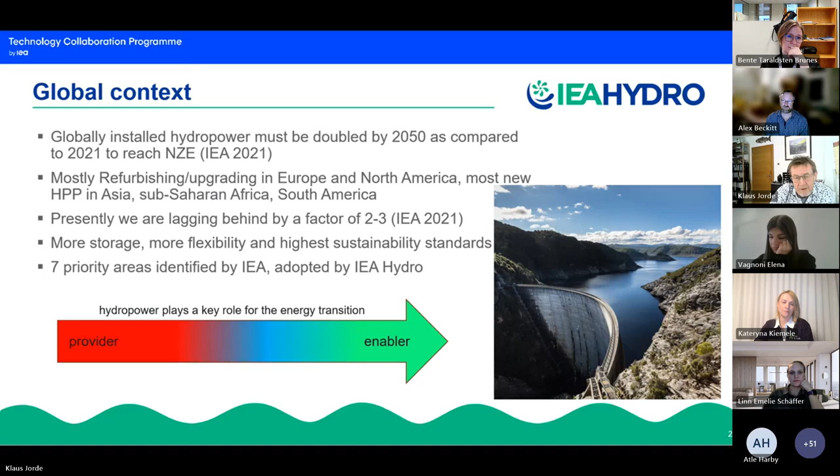Now it's okay. It's a little bit delayed here.

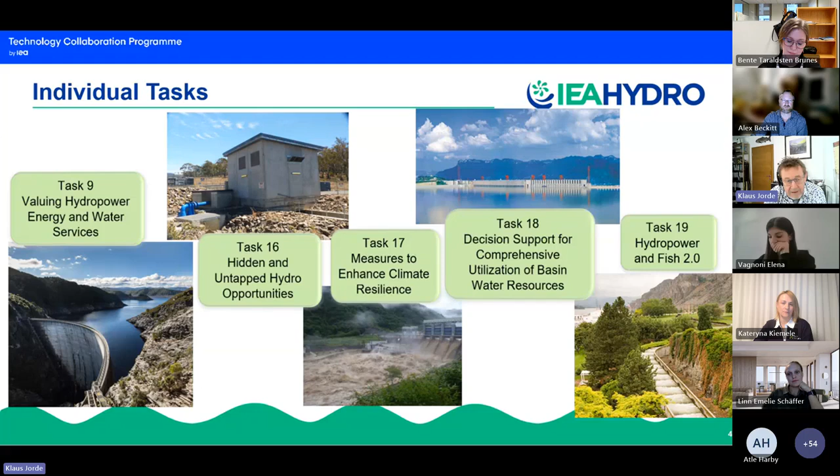Then we have 16 on hidden and untapped hydro opportunities. 17 looks at climate change. 18 is looking at how to make decisions in very large catchments, very large basins with multiple dams and hydropower plants and operators. And task 19 is looking at hydropower and fish issues.

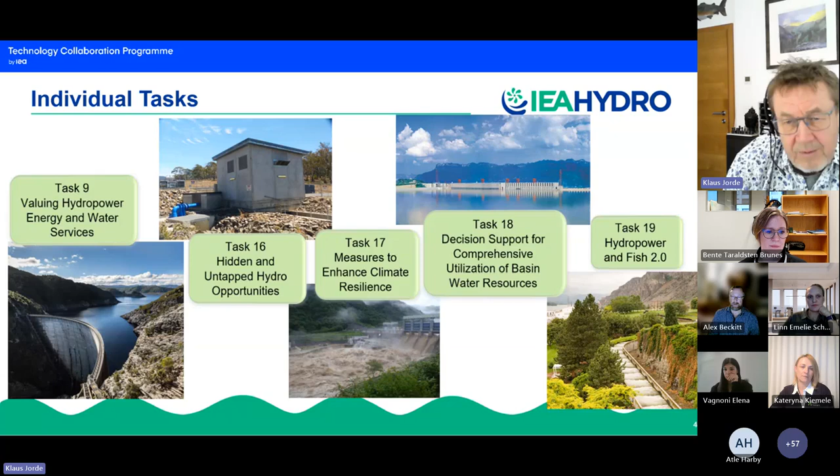It's very weird because it's not moving ahead, and I don't know why it's not changing the slide. Now it does. Okay.

And then we have this topic on hidden hydro, which mostly looks at hydropower at existing infrastructures, but also expanding existing hydropower plants in the way they operate, and they provide storage and flexibility, even if they are not really designed for that. We also added a small pumped storage component to that theme.

And then we have some overarching components like digitization, artificial intelligence, better alignment with the IEA mission, communication, dissemination, increase the visibility, looking for new participants. So that's kind of overarching apart from the technical issues that we are looking at. This is all distributed across the different tasks.

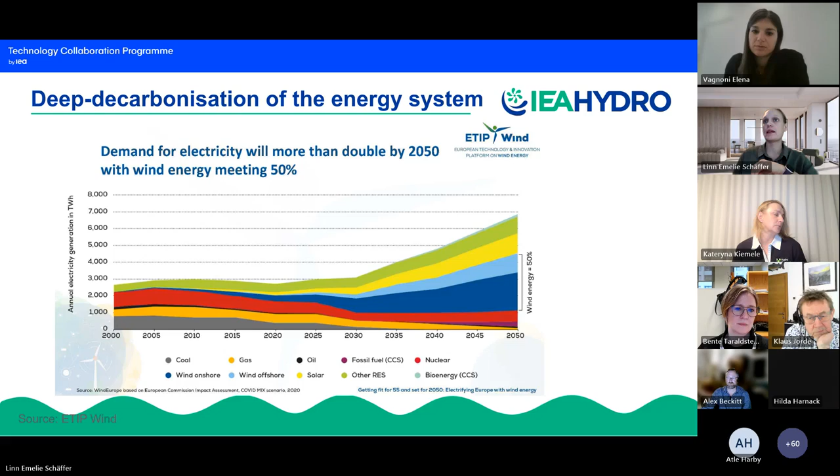Okay, now it's okay. Yeah.

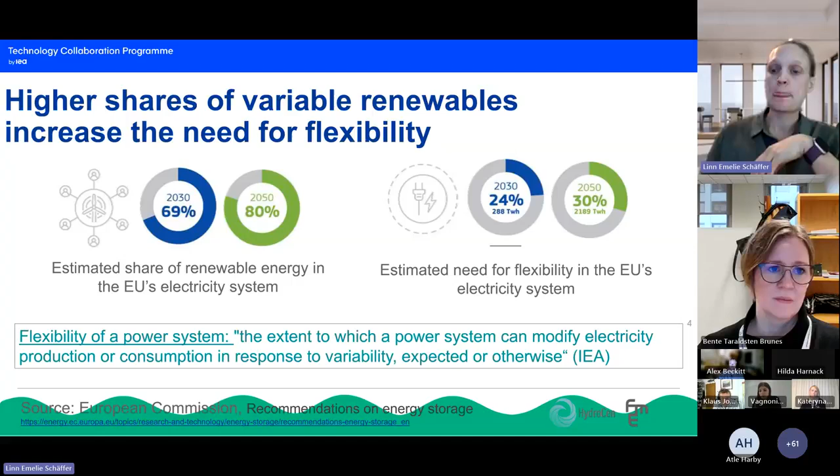So a broad definition of flexibility of a power system can be, for example, this: the extent to which a power system can modify electricity production or consumption in response to variability, expected or otherwise. So this is a definition from IEA, but it's still very broad, and it still holds a lot of different types of challenges to the power system. So in our work in IEA and the workshops and discussions, we have tried to describe this closer and define it into different types of products and challenges.

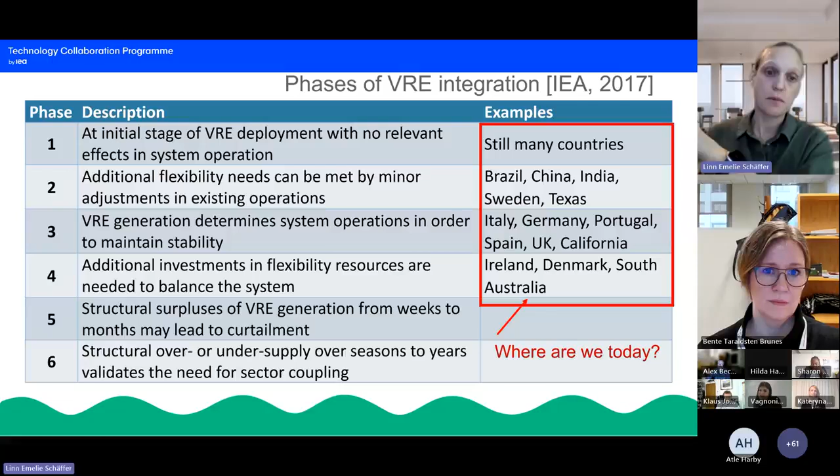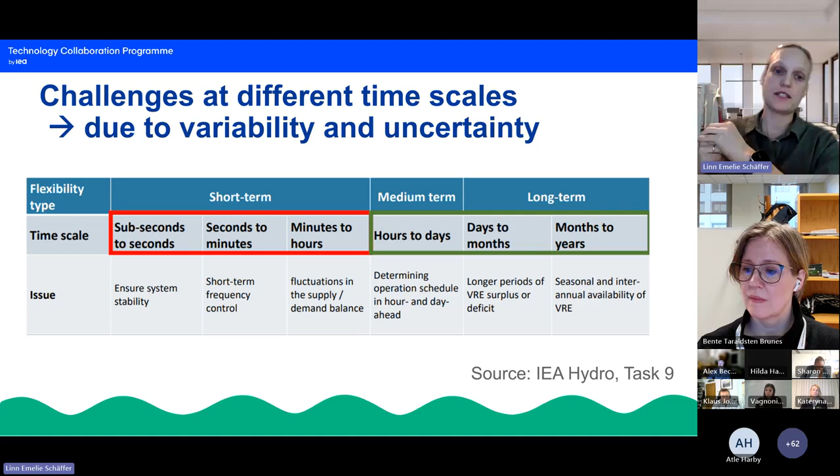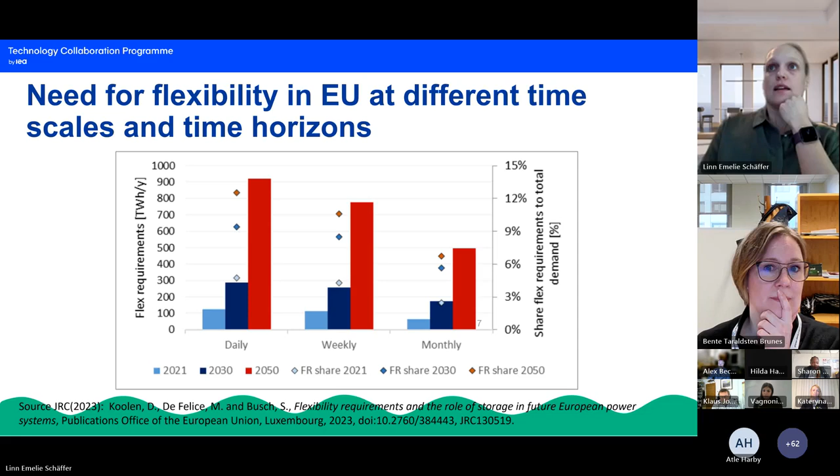I think that we need to progress now, Linnea. Yes, but it is 12 minutes, right? Yes, but please keep that in mind.

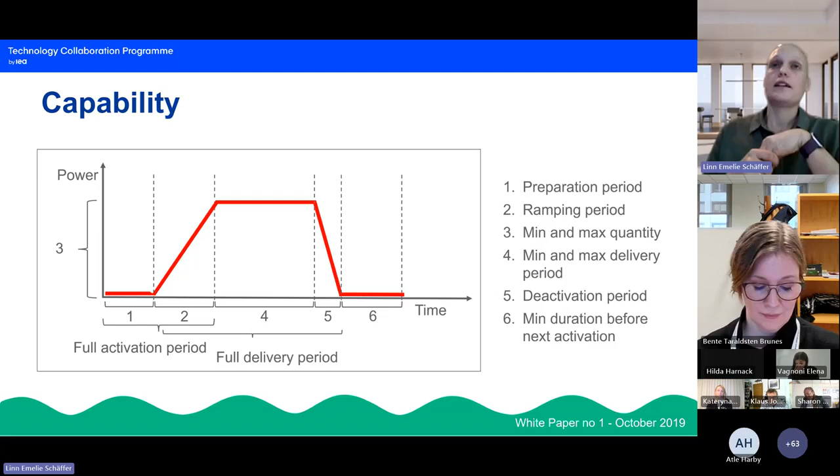Yeah. Okay, and then you can also look at the capability of the flexibility resource. So you have different types of requirements to the services that are delivered. So it can be the preparation period, how quickly you can ramp up or down, the maximum power that is delivered, the total energy that is required to deliver the service over a certain amount of time, and then also the deactivation period and if there is a need for a rest period, or how often or frequently this service can be supplied.

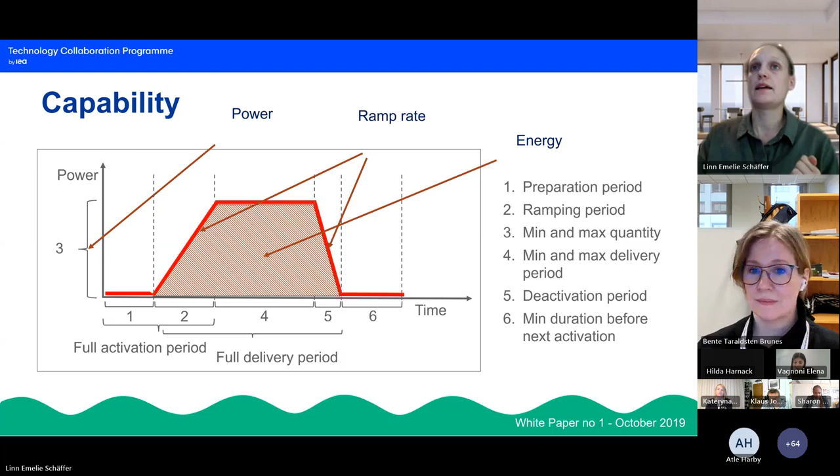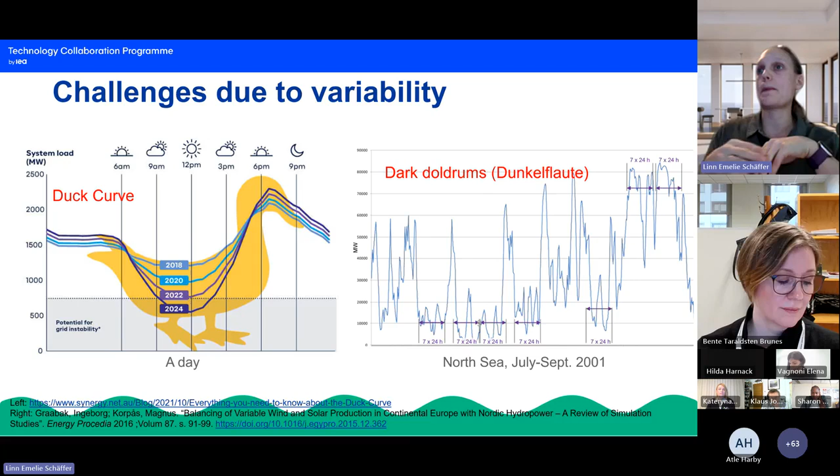And in Task 9, we've looked more into this. So Abhishek Somani has coordinated work on this of resource drought and the need for long duration energy storage. And I think this will be very important now. It's already becoming important, and it will become even more important as we have larger shares of wind power coming into the system combined with solar power.

And the plots here are from this study, and they are for the Californian system. And they have looked at historical data and counted how often these resource droughts were occurring in the historical data. And we can see that there are quite many events ranging from 4 to 16 hours. And there are also a few events lasting longer than 16 hours in this system. And you can also to the right see the total energy deficit.

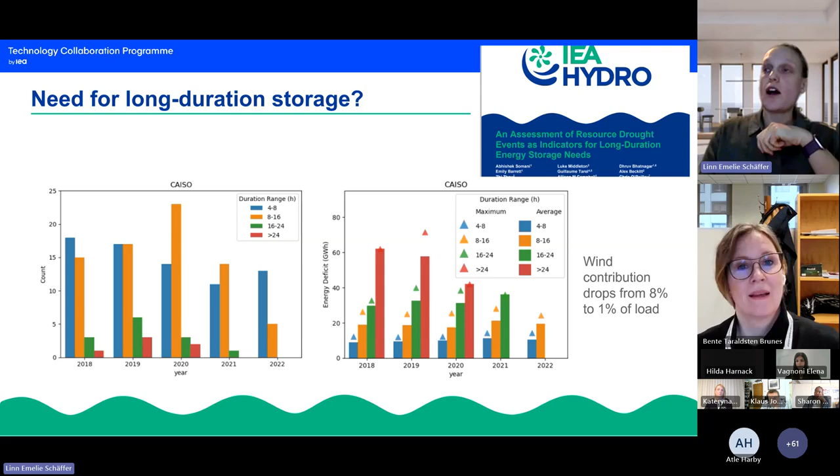And in the current system in California, this contributed to a drop from covering about 8% of load to 1% of load. But you can imagine if wind power is covering a much larger share of the load, it will be very challenging to meet these large amounts of energy over a longer period when you have these drought periods. So this is something we also want to focus more on in IEA Hydro Task 9 moving forward.

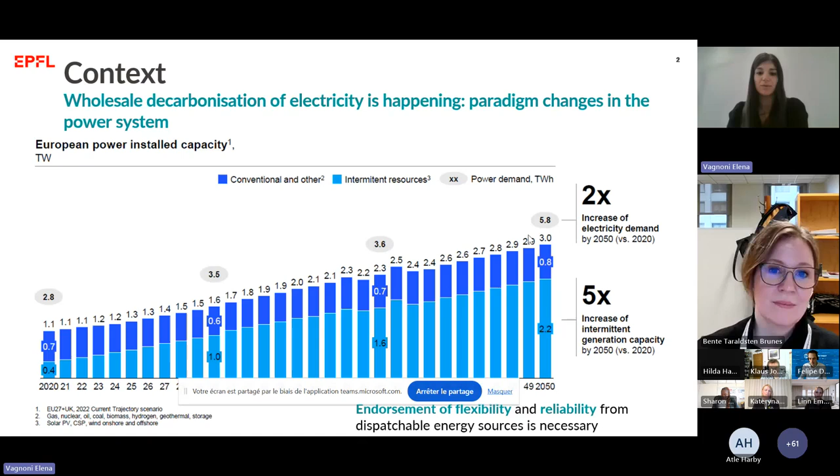So my presentation will talk about how hydropower can actually contribute to flexibility. So thanks, Linn Emelie, for the excellent introduction. So I will not spend too much time saying that decarbonization is happening, and we definitely need the endorsement of flexibility and reliability to guarantee the security of the power system. We understood that flexibility is needed because of a set of different short-term and long-term basket of products, which goes from sub-seconds to years.

We talk about ancillary services, all those services that different kinds of energy sources can provide to the grid in order to balance both voltage and frequency across different time scales, so from sub-seconds to hours. And then we also have other kinds of flexibility services that are needed to guarantee the adequacy of energy supply to the grid, and that goes from days to years.

Hydropower is actually key in providing all these different grid services, and hydropower is also the only renewable energy source that allows for providing all those different services to the grid. So it's really a key energy source that we should endorse in order to allow the energy transition to happen.

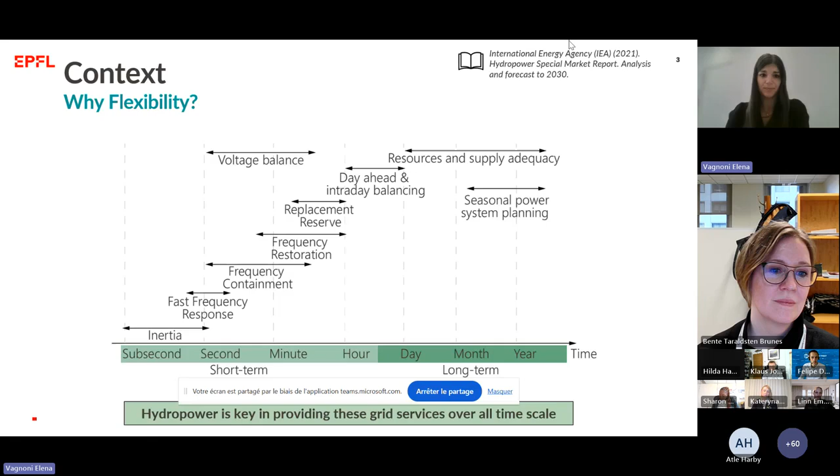Unfortunately, this provision of ancillary services and more generally of flexibility doesn't come for free for hydropower. Especially we look at what happens to hydroelectric units. Those are today strongly stressed because they do not operate anymore according to their design condition. Typically, we had hydropower operating into a single optimal point with a tiny area around that, entailing good flow conditions, for instance, in hydraulic machines.

Because of a new need of the grid, because of this need of flexibility and dynamic changing in operation, more frequent startup and stop cycles, etc., we are asking hydropower to operate into multiple points that actually do not coincide anymore with design conditions. Also, on top of this flexibility burden, we also have new challenges in hydropower technology coming from both sustainability requirements and resilience to climate change.

So all those new operational requirements, exactly what do they represent for hydropower? They represent extended operating range, more frequent transient operations, for instance, startup and stop cycles, changing mode from turbine to pump, etc. in case of pump storage, and efficient water management.

And there is a strong need to provide new technologies and advance the science behind them to comply with the new industrial needs. That entails an optimization, for instance, of power plant operations, so new methods to steer operation, new monitoring tools, as well as new maintenance strategies that take into consideration not only efficiency, but also, for instance, wear and tear and vibrations, water management, etc. And also novel technologies, design and materials that are more compatible with this new paradigm shift in operation.

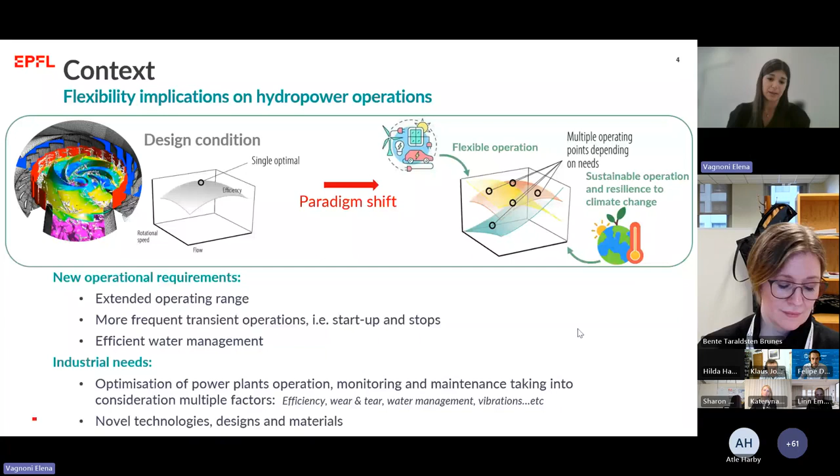With this introduction, I'm very happy to introduce to you the recently completed XFLEX HYDRO project. That has been a European project funded for 4.5 years, putting together 19 partners from academics to key industrial players to demonstrate how hydropower can actually extend power system flexibility. All solutions that came out of the first phase of the project on innovation have been demonstrated in 7 demonstrations, so 7 hydropower plants from run-of-river, storage and pump storage hydropower plants.

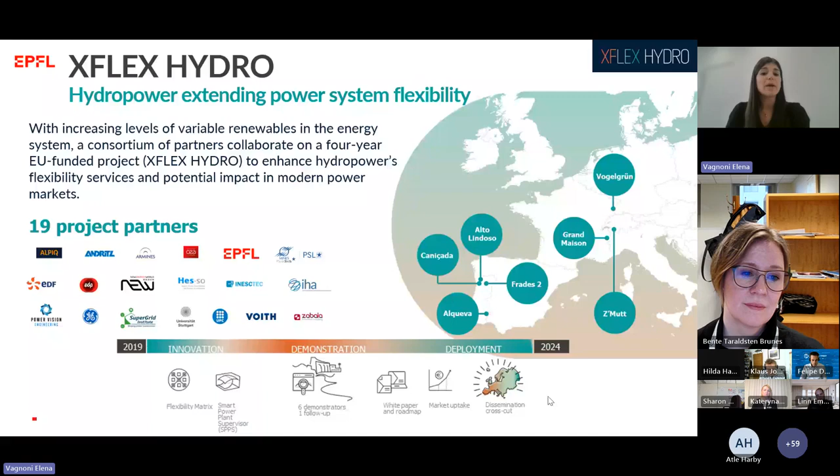And the last phase, where all different technologies demonstrated on site have been also deployed for a future adoption in the markets. So what I'm going to present in the next few slides is what did we implement? What are those innovative technologies that allow for extending hydropower flexibility? What are the main results of demonstrations with a few examples, and also how we can exploit them beyond?

So the first technology that was defined, improved, and demonstrated was the hydraulic short circuit, applied for pump storage power stations featuring more than 1 unit or featuring 1 ternary group, for instance. This was demonstrated in Grand Maison, France, but also in Frades and Alqueva in Portugal. Each of the power plants has different features. The main benefit of this technology is that it allows for extending the operating range and allows for regulation in pumping mode, provides frequency control in pump mode, and also allows for a faster switch from pump to turbine and vice versa.

So just to make sure that you understand it correctly, what does hydraulic short circuit mean? It means the simultaneous pumping and generation from two different units. So if you have, for instance, two reversible pump turbines, as in this example, it means that one operates in pumping mode, and then part of the flow, instead of going back to the penstock, recirculates in the second unit, which is generating.

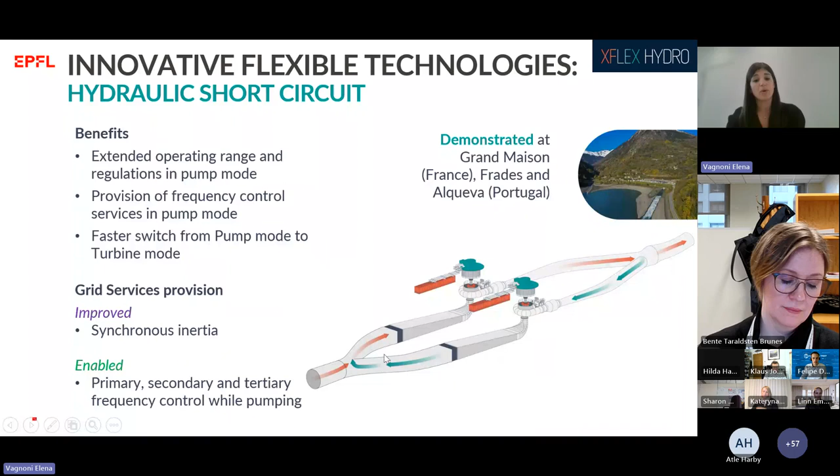Since the generation can be variable, you can control generation, and you automatically put an offset on the pumping of the overall power station. Thanks to this, you improve synchronous inertia and you enable all different ancillary services, from primary to tertiary frequency control, also in pumping mode, that otherwise wouldn't be possible.

As an example, as I said, this was demonstrated in several plants. In Grand Maison, this has been in commercial operation since September 2021. And it demonstrated that the balancing power was extended up to plus minus 57 megawatts, and also that the hydraulic short circuit during commercial operation accounted for 55% of the time in pumping mode. So definitely worth the investment for commercial operation.

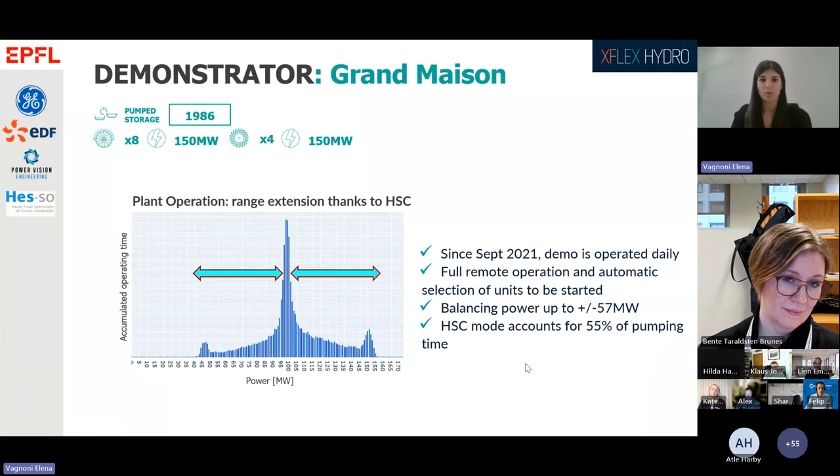Another flexible technology that was demonstrated in this project is variable speed. There are many plants already equipped with variable speed, mainly for efficiency purposes and extension of operating range. But we demonstrated that there are many other benefits that variable speed technology can provide to, in this case, pump storage power plants equipped with reversible pump turbines.

So on top of extending the operating range, it also enables regulation in pumping mode, allows for faster regulation with respect to fixed speed machines, improved operation at partial load, so giving more guarantees on the safety of the machine if we decrease the power production with respect to nominal conditions, and allows also for minimized fatigue trajectories. So fatigue in terms of wear and tear on the hydraulic runner.

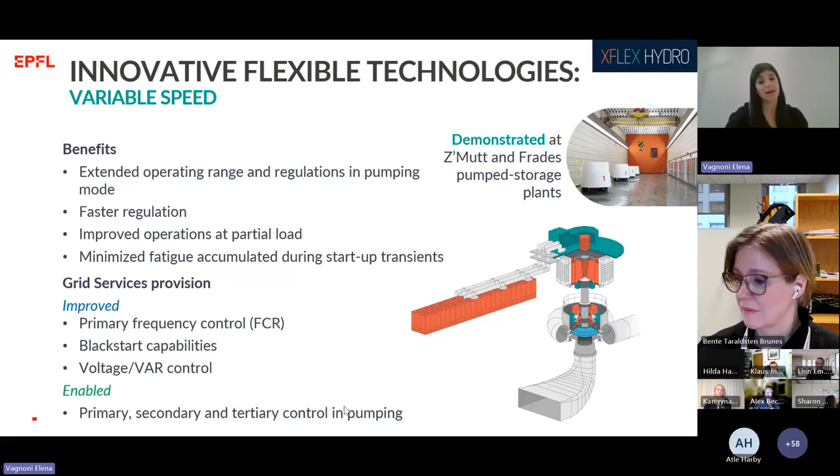Overall, this also means that we can improve, thanks to variable speed, primary frequency regulation, black start capabilities, and voltage control. And we can enable frequency regulation control in pumping mode, again, thanks to the ability of changing the speed through a full-size frequency converter or an asynchronous motor. As an example, this was demonstrated in the Z'Mutt power plant.

The key outcome is that we demonstrated that this 5 megawatt variable speed turbine can be put successfully into commercial operation, and for the startup sequences, you can see here in this graph a few trajectories to start up the machines that were studied and tested. We demonstrated that thanks to variable speed, with respect to a fixed speed machine, we can decrease up to 15 times the damage during such a startup operation. And we can also decrease up to 3 times the startup duration. So we can be faster in answering the requests of the grid.

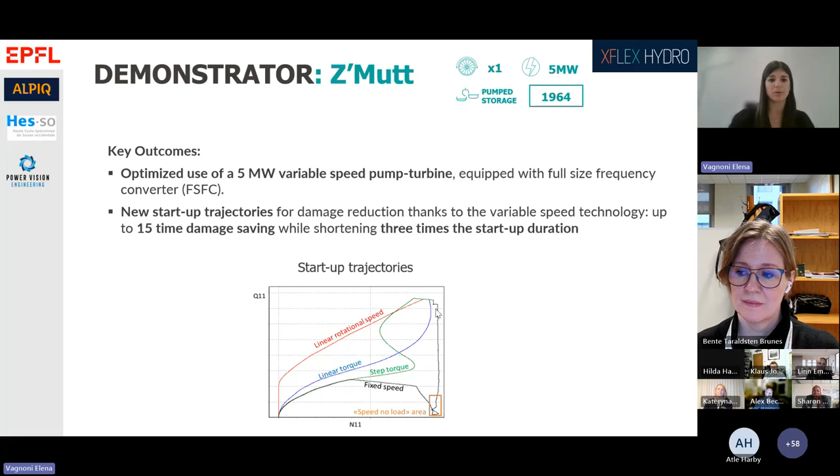The last technology that we demonstrated was hybridization with a battery. In this case, we have a battery energy storage system coupled to one Kaplan unit, demonstrated in a run-of-river power plant in France, Vogelgrun. Benefits are the reduced wear and tear on hydraulic components, a faster provision of frequency control services, because those are Kaplan units with a particularly big diameter, so they are not very reactive with respect to the control commands, and also the enhanced regulation margin.

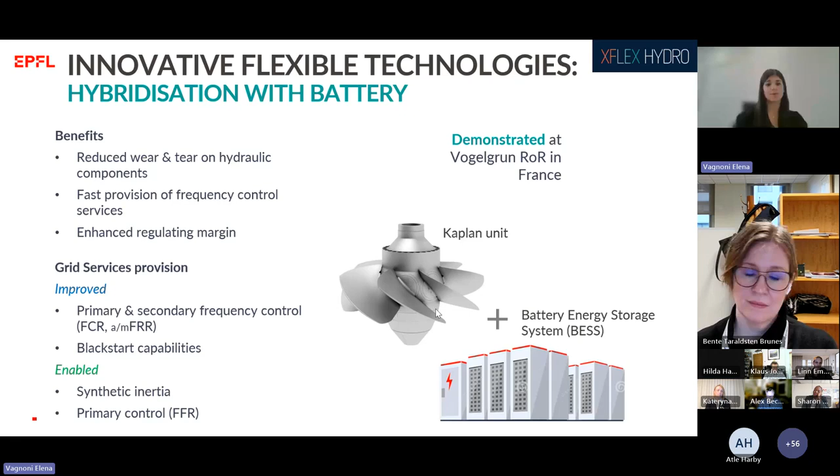With fuzzy logic, we were able to reduce it by 77% on blades and 82% on guide vanes with hybridization, while with double layer model predictive control, we were able to further reduce this on both guide vanes and blades by up to 96% of the mileage.

Just wanted to give you a kind reminder. There's 1 minute left, Elena. I just have a couple of slides left.

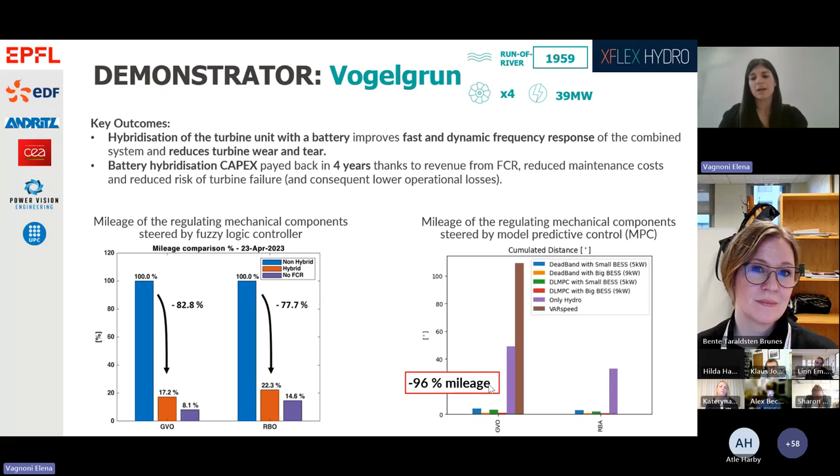Thanks. And just to give an idea, the investment cost, the capex on the battery, is estimated to be paid back in 4 years of operation, thanks to revenue in FCR markets, but also reduced maintenance costs and reduced risk of turbine failure.

Digitalization, of course, is also key. The Smart Power Plant Supervisor is our digital tool that integrates turbine dynamics and condition knowledge into the advanced control unit and operation, as well as into maintenance, predictive maintenance. It's also a tool that improves the flexibility of the machine, improving the quality of ancillary services provision while reducing the OPEX cost on the machine.

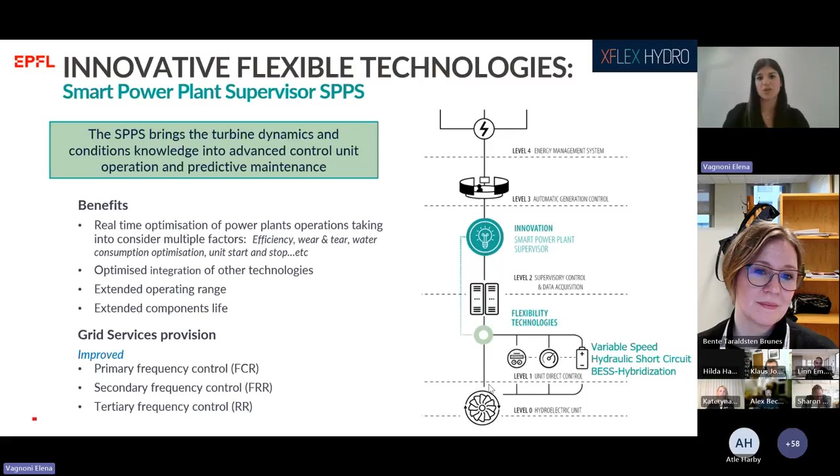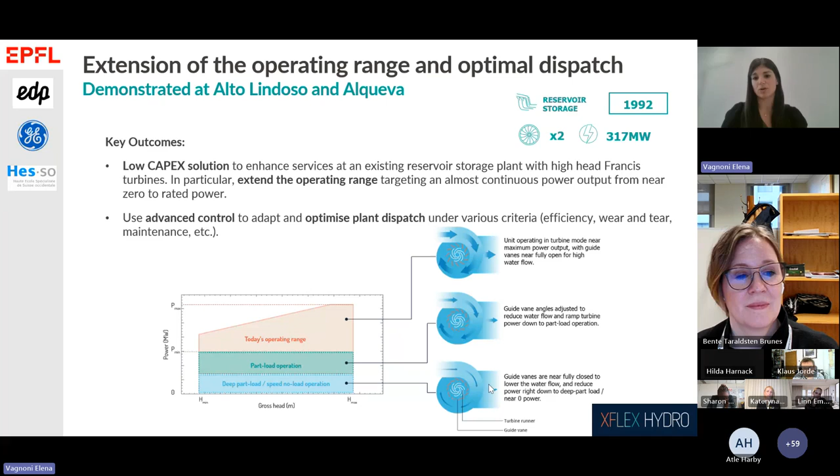I won't have time to go through all the different results of our project. Here, for instance, you have the extension of the operating range without any further technology, just by integrating condition knowledge of the machine, for instance by decreasing the number of start and stop cycles and better dispatch.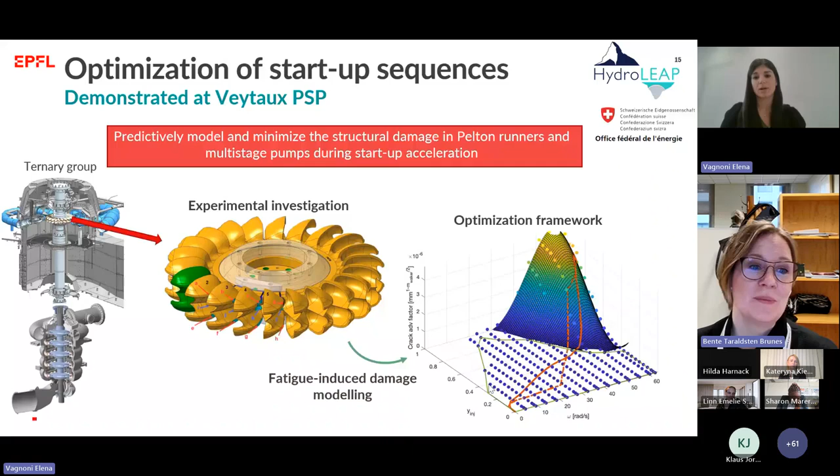Thank you so much, Elena, but I'm afraid that we need to continue on to the next one, even though I would have much appreciated hearing a lot more about all of these very interesting results from your research in HydroLEAP. This brings us to the conclusion slides.

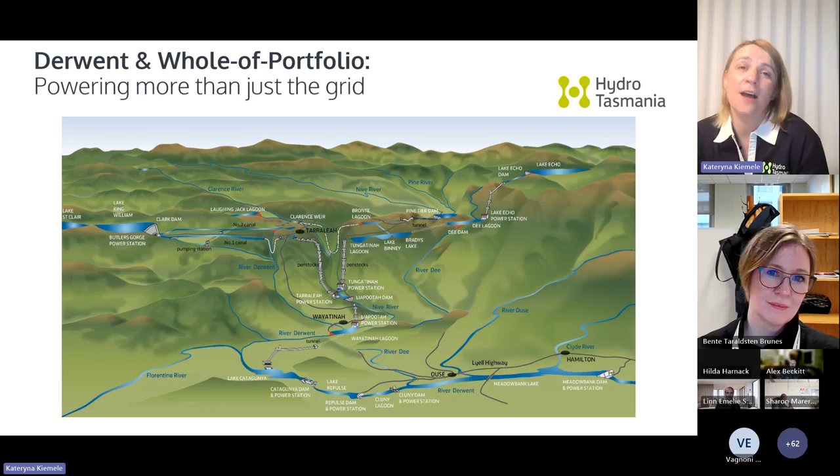Although not illustrated on this slide, many of our northern Tasmanian assets and our highest capacity dam, Lake Gordon, are essential to critical services like black start capability. This means that if the system experiences a regional or systemic shutdown, Hydro Tasmania is the sole contracted provider in the state to help bring it back online. This kind of reliability and flexibility is what makes hydropower a cornerstone of Tasmanian and national power grids.

So the next project, finally, that I would like to talk to you about is energy storage, something that becomes more and more crucial as the power system evolves. We heard from other presenters that storage and the increased penetration of VRE is just something that our system needs to cope with. And Tasmania is strategically positioning itself to be a multi-purpose provider, balancing baseload energy, flexibility in ancillary services, and critical energy storage.

So at the heart of this evolution is our Lake Cethana Pumped Hydro redevelopment project. This project is an exciting step forward. It will make use of the existing Lake Cethana as a lower storage, while a new upper storage will be built on the western side of the lake, creating a powerful, flexible energy storage system right in the heart of Tasmania. This project is currently progressing through local and federal regulatory approvals, but once completed, the Cethana Pumped Hydro project will operate as a long-duration energy storage with a capacity of 750 megawatts and a duration of 20 hours.

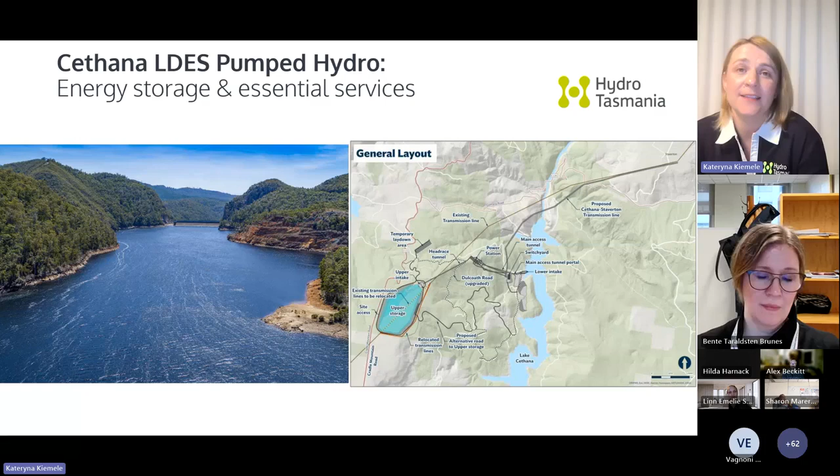This deep storage will be vital in supporting the integration of VRE both within Tasmania and in Australia. It will also be important in allowing Tasmania and Australia to weather low wind and low solar events that are projected to only accelerate over the coming decades. So where does that leave us? I suppose it brings us back to the starting point. How does Hydro Tasmania plan to navigate this energy transition while balancing the rich legacy with modernization?

We are excited about the journey ahead. We are in a unique position to leverage both the existing and future assets, along with the skills and passion of our people, to provide energy and flexible services and storage solutions that Tasmania, Australia, and even the world will need to operate sustainable, efficient, and reliable power. We hope that what we are doing here in Tasmania on this small island can serve as a model for the world, showing how we can meet the urgent need of global energy transition with innovation, resilience, and a commitment to the future. Thank you, everyone.

I feel like I've done my 8 minutes there. Thank you so much, Kat. I truly appreciate it. And with that, I think we will start with the Q&A session for today. So I would really encourage all of our participants to start typing in questions in the meeting chat. And I believe that I also get the pleasure of asking the first question.

So, Kat, I was wondering, are there any particular policy changes in Australia that have led to any strategic change in how you develop your hydropower projects? I think there are still some challenges in terms of hydropower. I think there's still some lacking support for long duration storage, and that's something that we heavily advocate at the national level and the global level in general. There have been some policies like LTESA, a long duration underwriting support mechanism that's been introduced in Australia in some regions, which help to support some of these long lead construction costs and projects in general. However, they're still quite partial and not consistent in nature. So that's definitely on our mind, and that's something that we are quite vocal about as well.